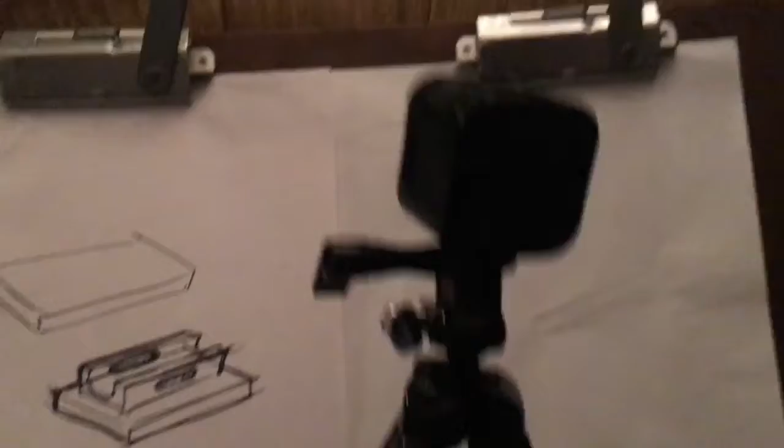So this is my tripod. Hope you're getting a good view of this. It's kind of dark in here. It mounts my existing camera on top of this small tripod. And the way this works is that this pin pulls out. I can pull the camera itself off, and the camera has that connector on it.

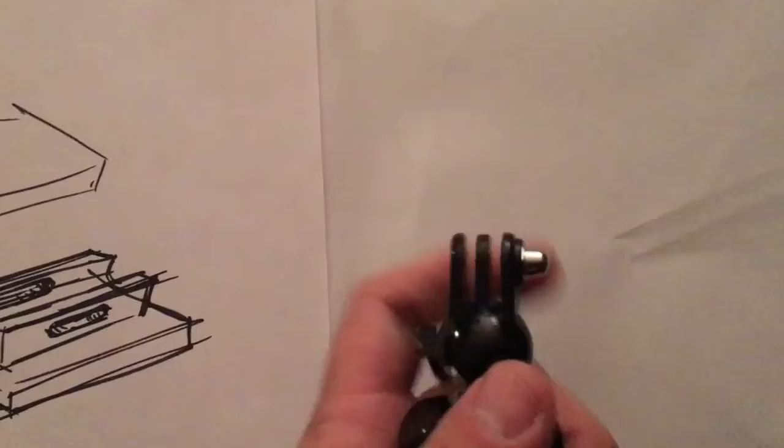So the pin slides through that, and there's a 3-prong connector on here with a nut on it to screw that threaded rod on. What I would need to do is put the 2 prongs that you see on the bottom of this, I can just measure those, and put them onto here. So this connects onto that.

I think what I'll do is put it on the front like this and move this piece to the front so that when I 3D print this, I can print it so that this face is on the base plate and I don't need to worry about extra supports somewhere else along the line. Or I could put this down here, but I don't really want all the weight distributed that way. So I'll redraw that and show you what I mean.

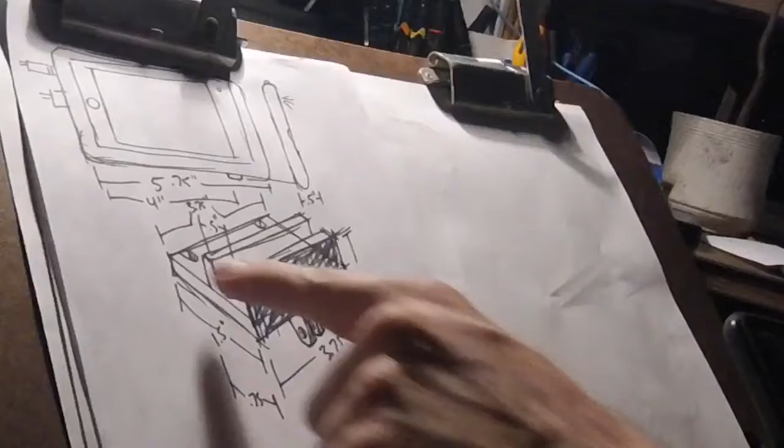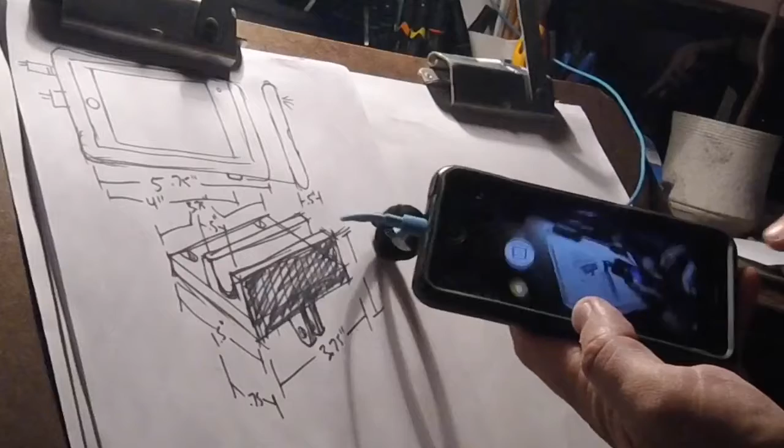As you can see, I have added most of the dimensions of my new tripod phone holder. I do want to know what the height of this will be. So I want to know if this is 0.5 inches thick. We look at my phone. What would a decent height be? And if I hold it like this, over here is the camera. It's 3 inches tall. So I'd say 1 inch should hold that pretty well, especially with rubber bands around it.

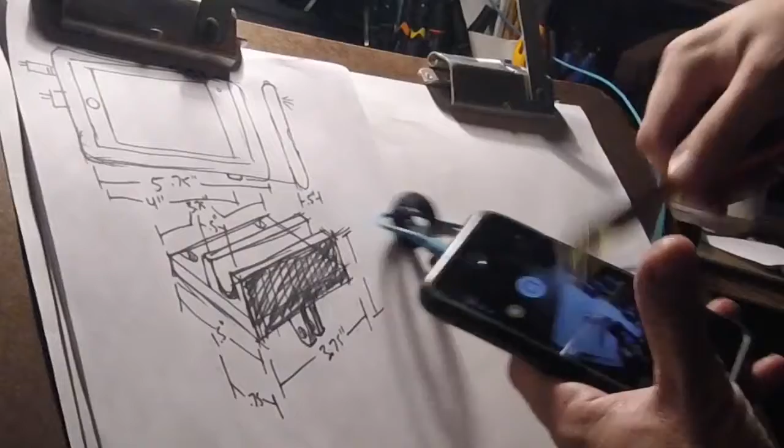I might as well go 1 inch and a half, just to add a little bit of height. So I know the height from here to the bottom of this is 1 inch and a half. I want probably 1/4 of an inch thick on this base plate to keep it pretty strong. 1/8 of an inch should do. I'll keep that 1/8 of an inch. And then the height of that is approximately 1/2 inch.

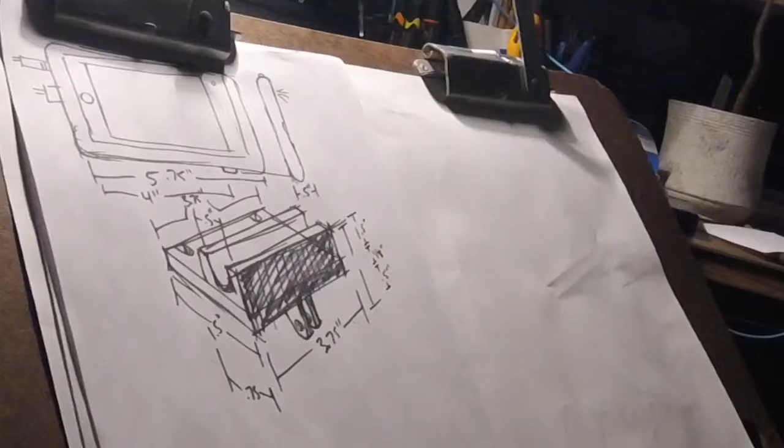So I said this height will be 1.5 inches. The height of the base plate will be 1/8 inch. And the height here is 1/2 inch. Okay, so 1/8 of an inch, I've got to figure that out in decimal. It should be 1 divided by 8 equals 0.125. So let's call that 0.125 inches. If we add 1.5 to 0.5 inches, we get 2 inches here plus 0.125 inches. So that's our dimension there.

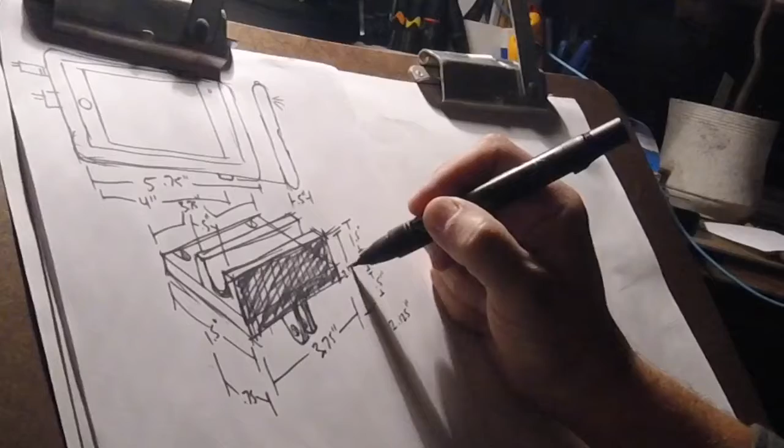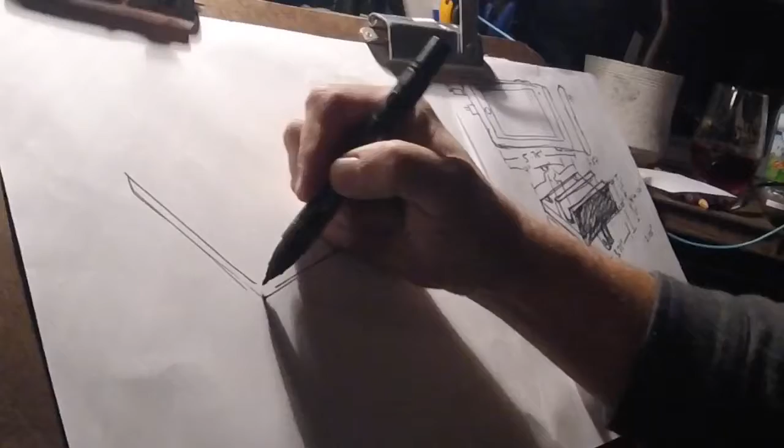Alright, now I know everything that I need. I'll pull this piece back off. I'll use that as a reference for my final drawing. Take this off. I'm going to draw this at larger than life size. I'm going to keep that like this. I want to counterbalance the phone. I'll bring those little holders down here. And when I have a curved surface like that, the other side has to be curved too.

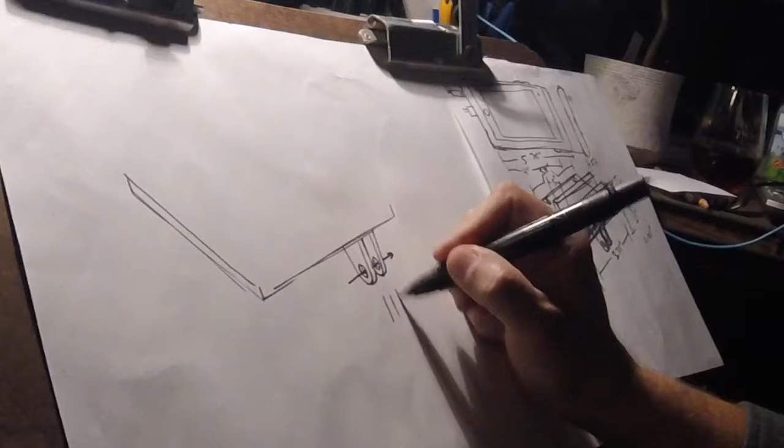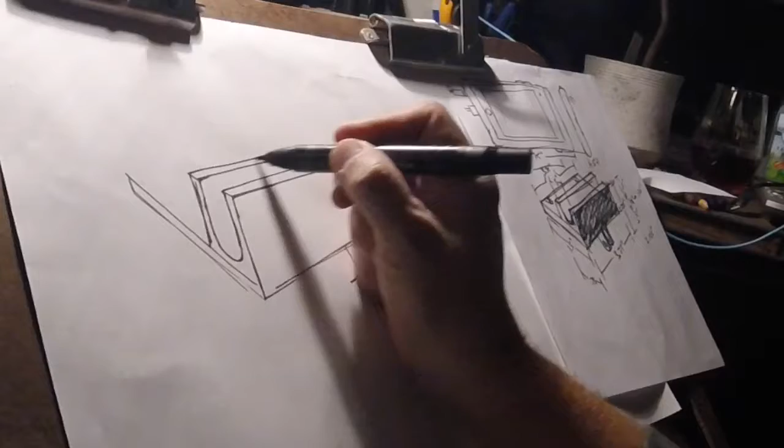Now, I have to put the place in for the pin to go through, and for those other teeth to connect. I want to take this up what looks like 1.5 inches. Half-inch wide. This is not drawn to scale. Again, I could easily draw this to scale, but I'm going to 3D model it. So as long as I have my dimensions on here, it won't really matter.

Remember, I'm placing those cutouts for the, I'll go straight across there. So those cutouts for the rubber bands are in there. A rubber band will strap over top of the phone on each of these sides and just connect all the way around. Now, I'll make it a little more durable by rounding these edges over. And I'm going to draw on here what's called a profile. I'm just darkening all the way around the outside edge so it's easier to see.

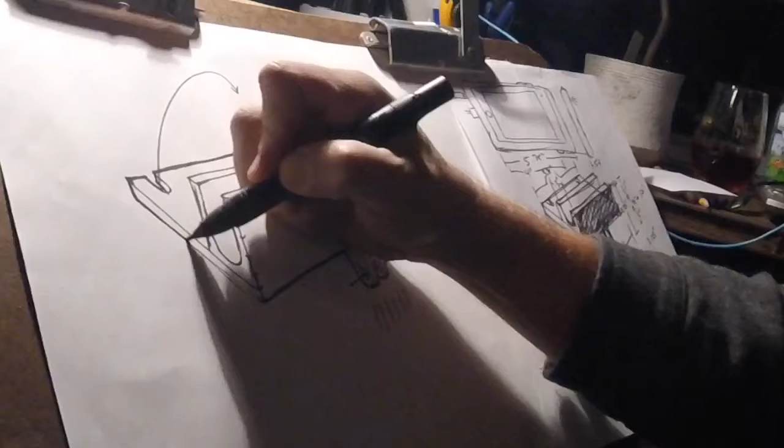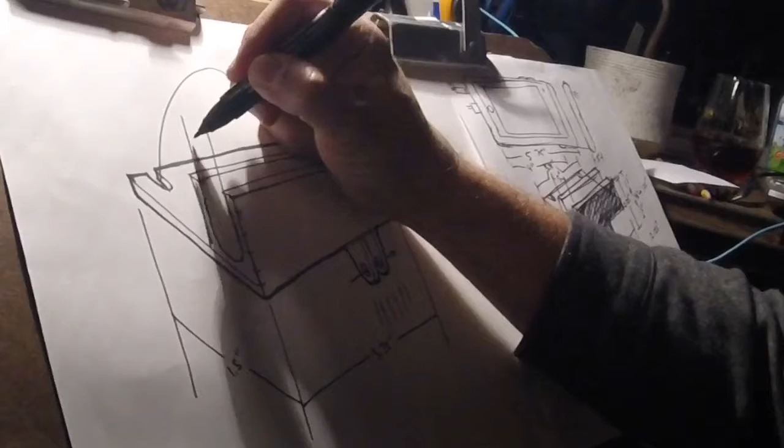Great. So I have everything that I need here, except for the dimensions. So, when you draw dimensions on to a drawing, you create these lines that show what you're measuring, 3.75 inches. The entire width of this is 1.5 inches. And the width of this, the inside, is 0.5. This entire width is 0.75 inches.

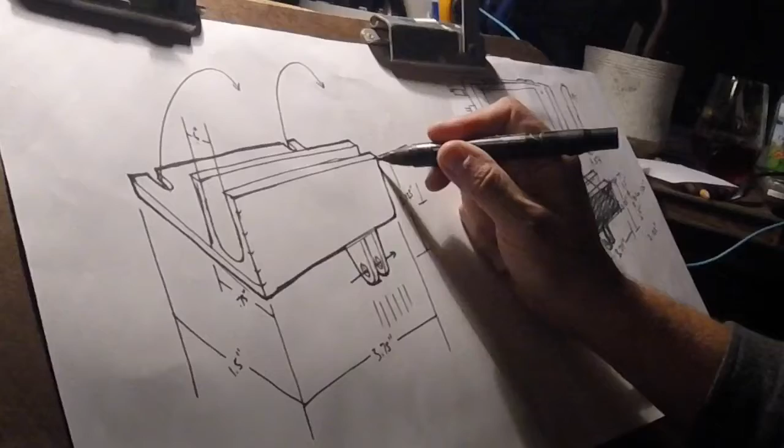Now, what else do I need? I need the height. So, this is the tallest point. This is the lowest point. So I draw my lines over. And it's 2.125 inches. Again, I want to detail all of this. Now, from the bottom to the top, because I'm adding this lip in, one thing I could do actually is cut this down a little bit, which means I can take that 1/8 of an inch away, because now the 1.5 only has to sit here and the 0.5 goes here. So that's actually 2 inches now.

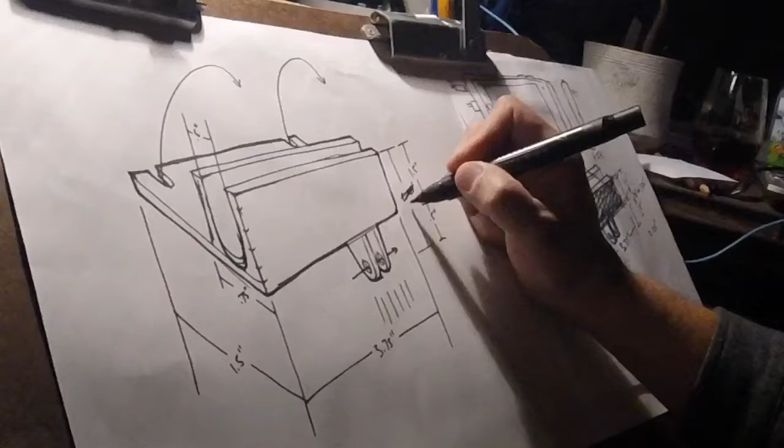That's 1.5 inch on the inside. And again, 0.5 inches. I still need this to be up, so I was wrong. 2.125 inches. And this is still going to be 1.5. Alright. I think we're good to go on this. Once I get my laptop back, I can 3D model and 3D print this.